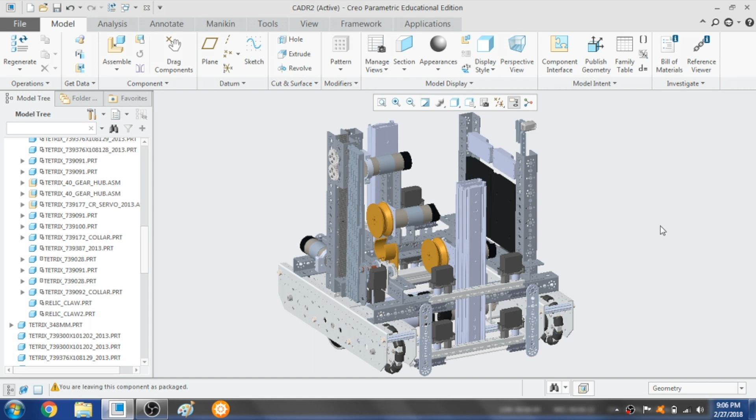Today I'm going to show you how to set up augmented reality with your PTC Creo assemblies in 4 easy steps. First, click on the Tools tab and then click Add ThingMark. A ThingMark is what PTC Creo uses in your phone or tablet to project your assembly onto a sheet of paper.

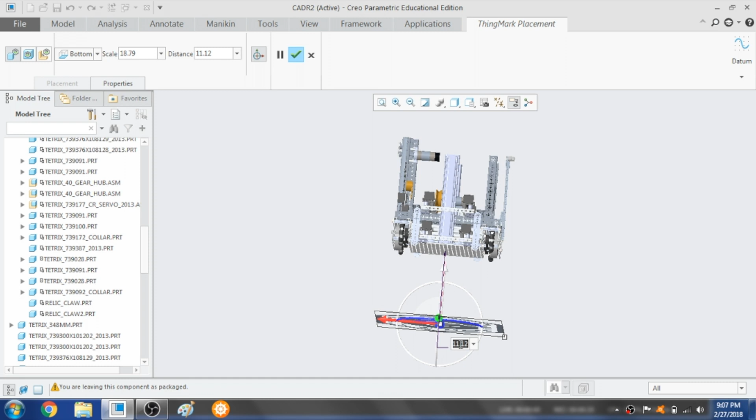Creo automatically makes this pretty big and quite far away from your robot, so the first thing you want to change is make sure it's on the bottom of your robot. Now we need to scale it, because if we tried to print this right now it would be way too big—you wouldn't be able to fit it, since the robot is 18 by 18 by 18 inches, so the bottom of this is far too big to print.

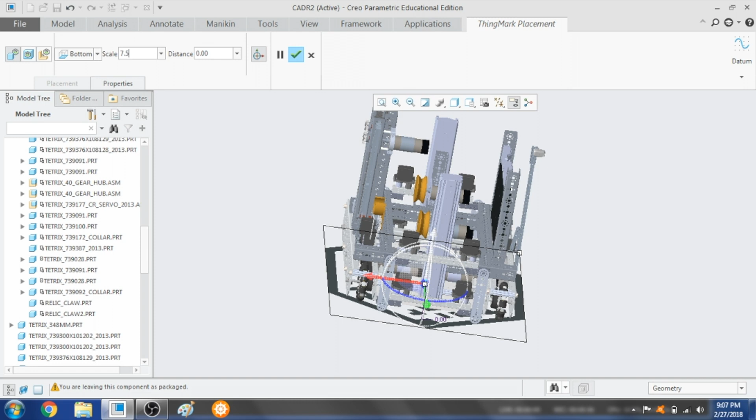So I'm going to change it to 7.5 so we can fit it on US letter paper. There we go—it's nice and centered on our robot.

And we are ready to publish our model. Publishing our model will upload our assembly to a PTC Creo cloud service, and then we'll be able to access it in the app just by scanning the paper when we print it.

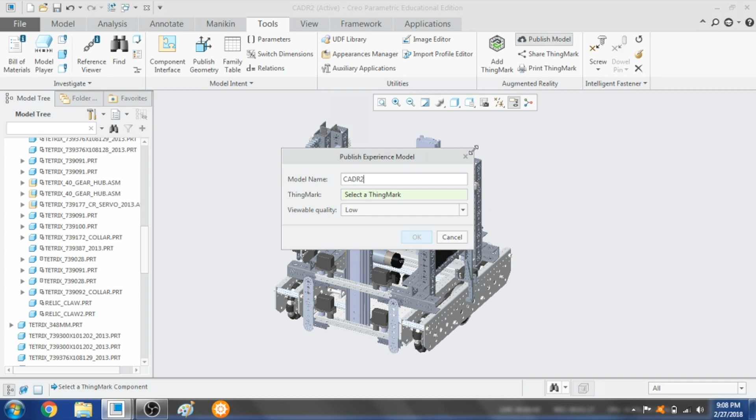So we've got to select the ThingMark that we just made, and go ahead and leave the quality at low. This will make it easier for your phone or tablet to render your assembly.

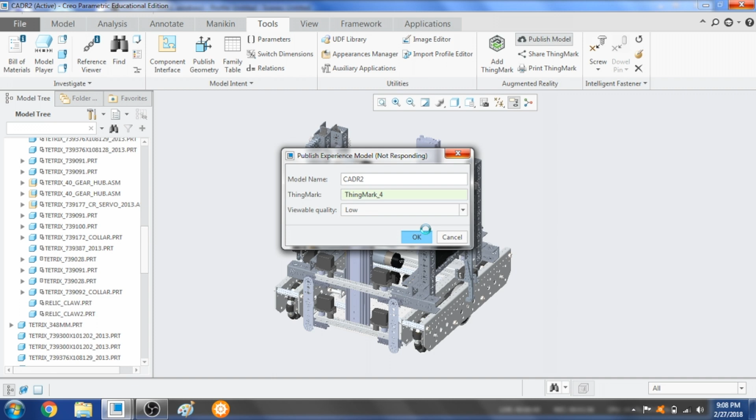Click OK. Now this may take a while to upload, but as long as you're connected to the internet you'll be fine, and you may get prompted with a dialog box to sign into your Creo account. Go ahead and do that, click OK, and you should be fine.

The next thing you're going to want to do after you publish your model is print your ThingMark. But before you do, you have to scale it. There are one of two ways you can do this.

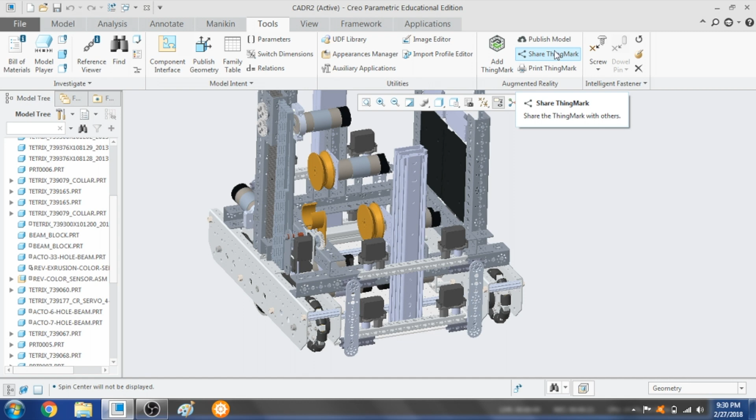You can either share your ThingMark and email it to yourself, then resize it in some sort of word processing document or something like Photoshop. Or you can print it as a PDF and do the same thing.

So as you can see, I emailed myself my ThingMark and uploaded it to Pages, just to spite every Windows user ever. I'm going to resize it to the 7.5 inches we set in Creo, then center it and go ahead and print it.

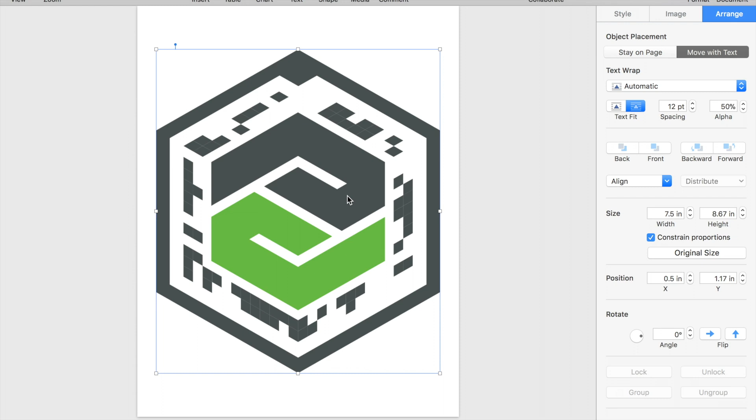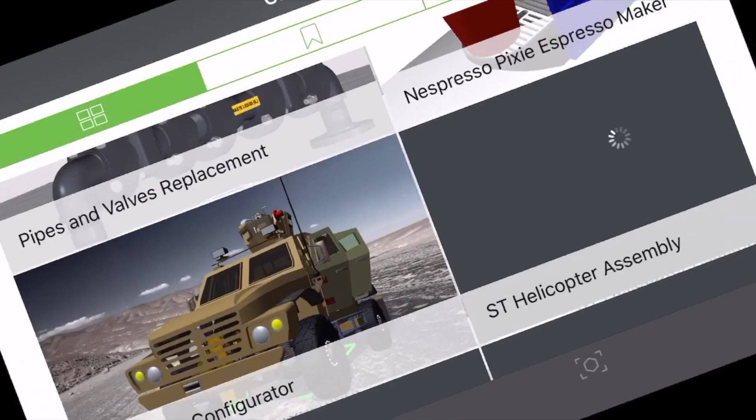So we're going to go ahead and download the ThingWorx app so we can view this in augmented reality. Once you have the ThingWorx app downloaded, open it up, click on that bottom right hand icon to scan the ThingMark, then go ahead and open automatically—it'll save you time. Let it do its thing, and there you go.

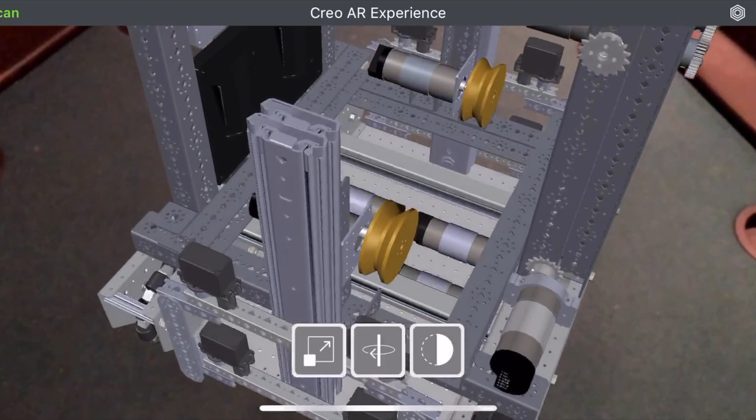You have an augmented reality version of your robot. You can get pretty up close and detailed with it, as long as you don't stray too far away from the ThingMark.